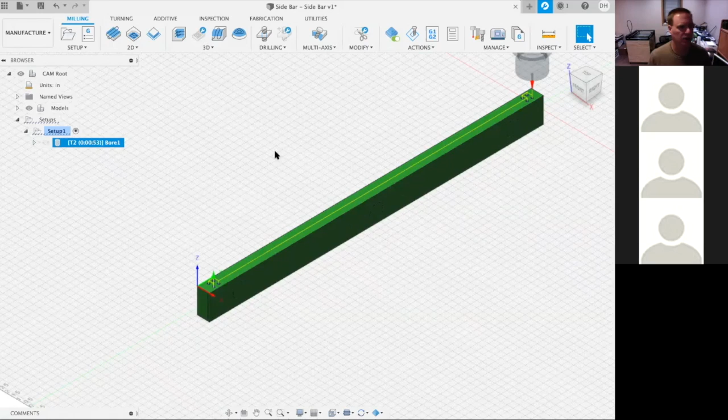Now what do we do? Well, we go to our next setup. So we are good with this one. We have our setup. Now, a couple things while we're on this, just to kind of check things out, we can select our setup here and we can select, right here.

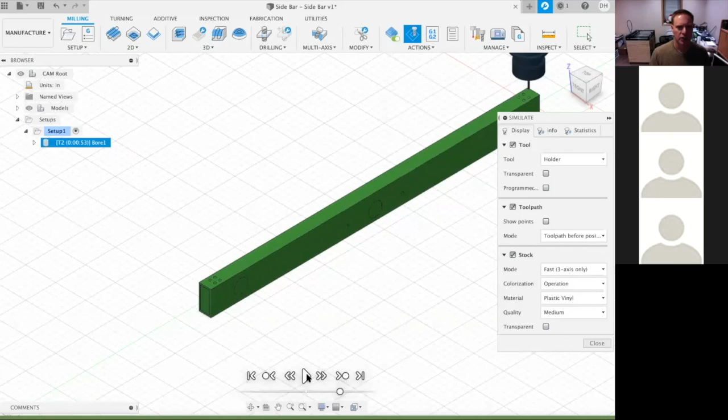Simulate. You guys want to simulate one? Yep. Okay. So if you go up here to actions and then simulate, if it's not a button up here, I may have added that. The simulate button then will bring up the simulate dialog box, and it gives you a play, pause sort of thing down here. You can hit it and it will actually show the tool working and show it doing each of the holes. Okay. This can be incredibly valuable to see how the tool moves, to make sure that you're not hitting anything, to make sure your tool path looks correct.

The other thing you want to do is down here at the bottom, I'm not sure whether you can see it that well on my screen there. Hopefully you can. There's this gray bar right here, and you can actually click it and move to any area that the tool's at. Okay. It's really important that there's no red marks on this bottom line right here. Red marks indicate a collision or something has gone wrong with your tool path.

Okay. So we don't want that to show up down here. We don't want any red marks across the bottom in the simulate mode. This is a great way, and you should always check yourself when you're done to make sure there are no red marks when you simulate.

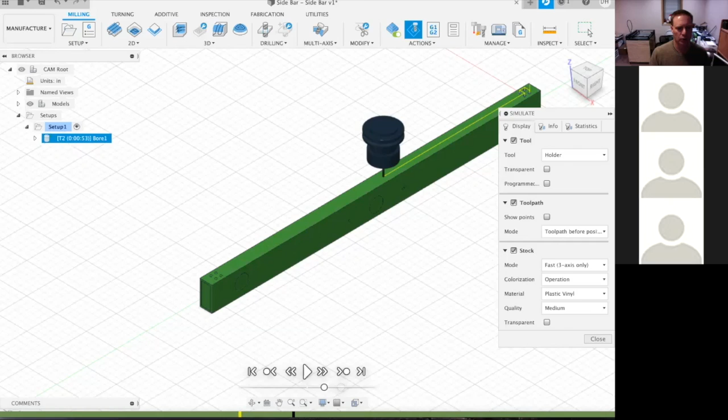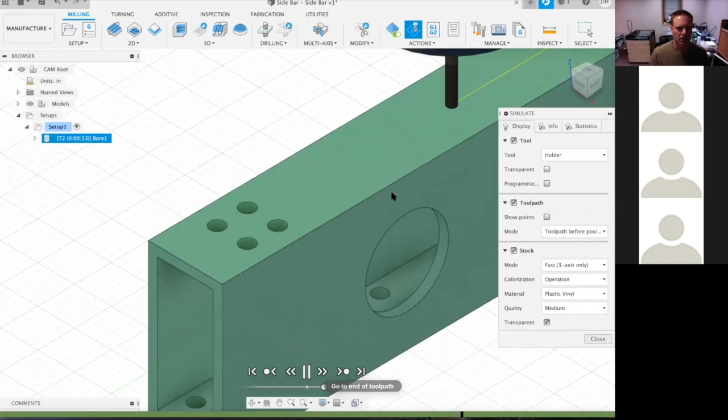Okay. You can do different things like make your stock transparent when you're doing it. You can zoom in as it's doing it. You can make different colors and so on. You can slow it down so that you can see very precisely how the tool is moving. Just move it along here so you can see how it's coming down and going in and going around and around and clearing everything out and going to the next point.

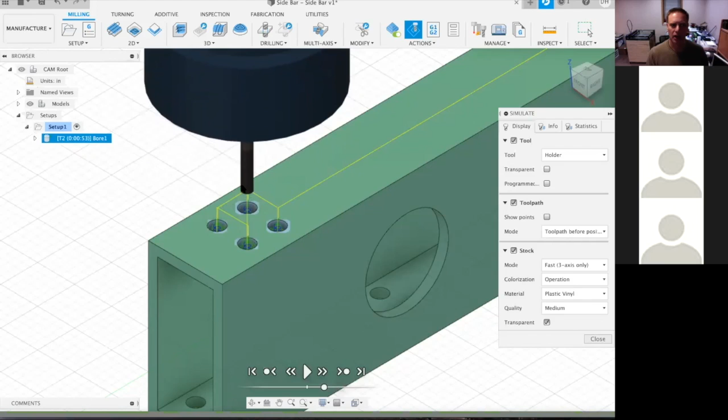Okay. So it's kind of fun to be able to see how it's working once you get it set up. And again, you absolutely need to do this to validate that everything's working correctly. Okay. And then it's done and it ends there. Right. The other thing that shows you is where it's starting. It has selected to start with a hole in the back and then move to the holes in the front.

All right. There are ways that you can change which holes it does first and second and all of that good stuff. We're not going to dive into that. That's not a big deal for us at this point. So